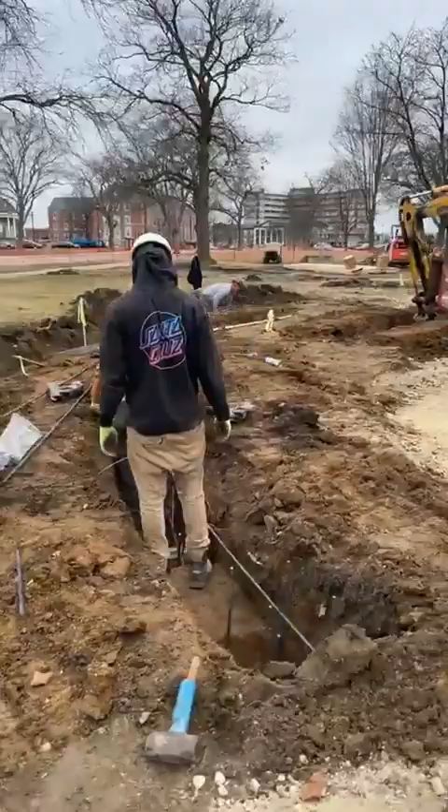Okay, here we go. So we got Milcon Concrete out here, and they've dug the foundations for the seating, and fabricating the rebar.

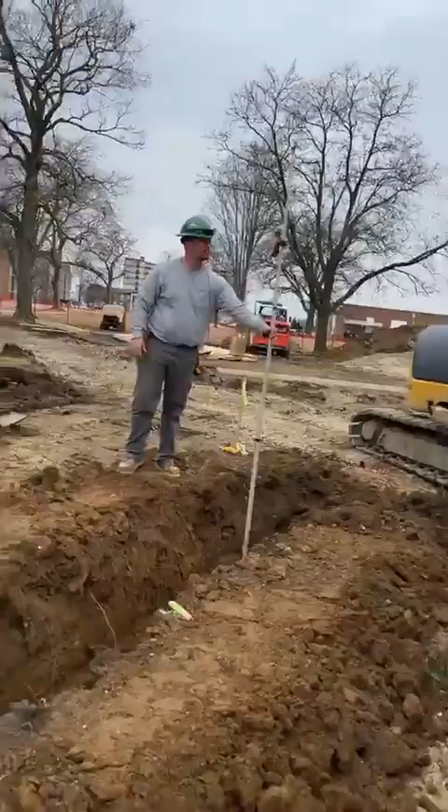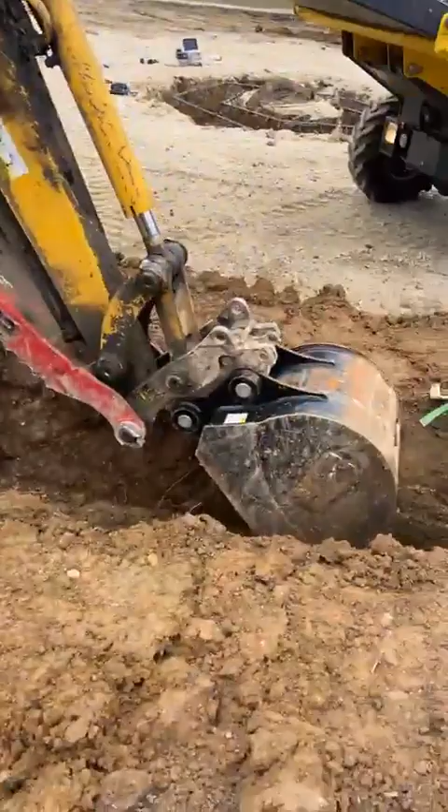And this is Seth. I got it going, Seth. Seth doesn't like to be on camera, but I convinced him to do it. I appreciate that. Yep, so you guys are making huge progress here today already.

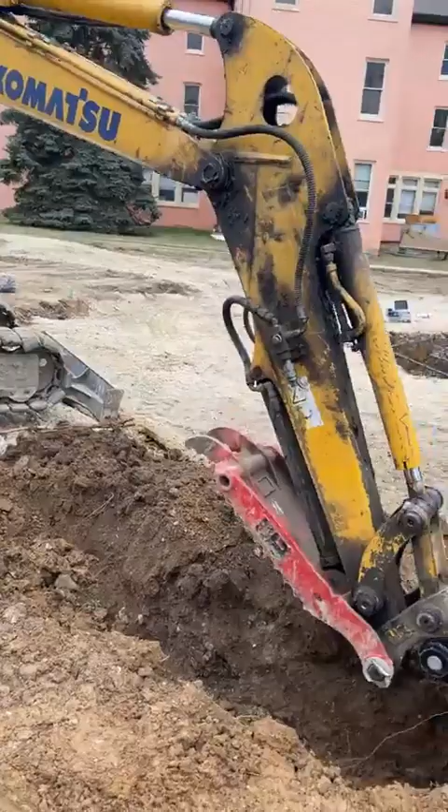I was out here and none of this was done. So what's going on? Explain to me what you did first. Well, we read our blueprints and gathered some information on what we needed to get our foundations laid out.

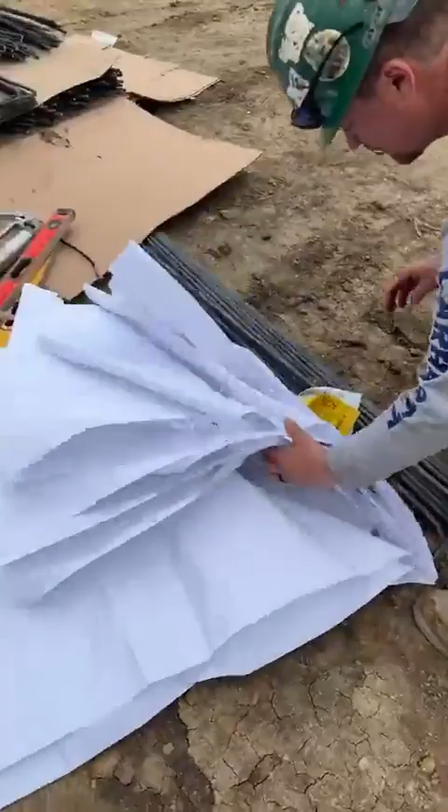Yeah, let's go over and look at the blueprints you got. People are fascinated by what's going on, as I told you. It's a little windy, but we're able to look at our blueprints and figure out.

We're able to find out our elevations of our bottom of footer and top of wall, as well as, I believe, we can find out what our radius points are from our center to the back side of our walls on all those. And then these are the seats, right?

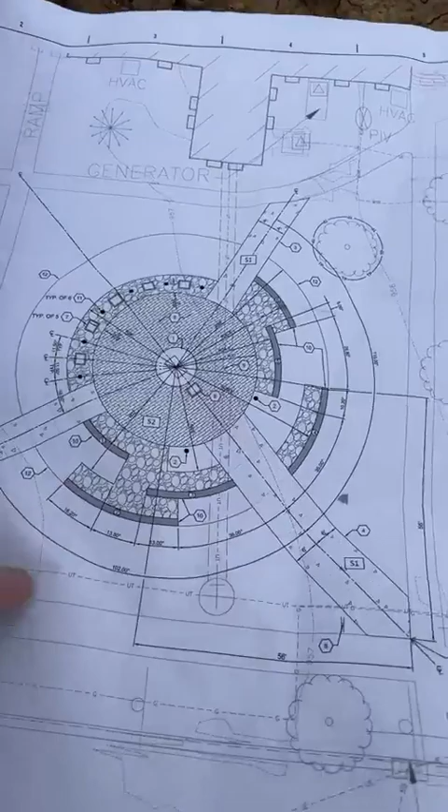Correct, so the radius seats, these are all going to be bench seats. You're pouring the foundations for those? We're pouring the foundations for them, and there'll be a seat wall put on top of that. Right, and it's all rebar, right?

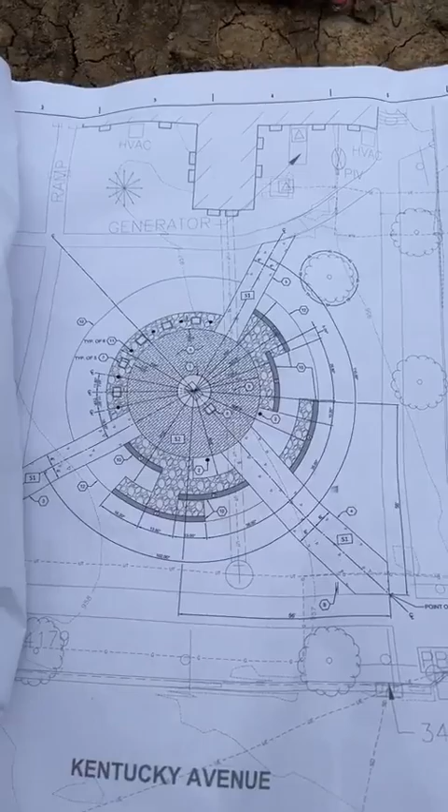Correct. And then the middle, tell me what you did there. So in the middle, we have another radius point that we pull, and we put another wall on top of it to hold a monument base.

And back here, so that footing gets laid out on this radius. Got it. And we pour the footing that holds the concrete wall.

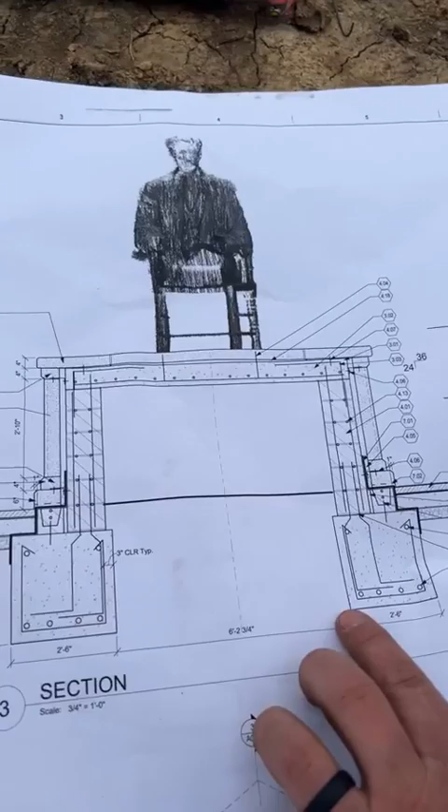Right, and there's a side view of the foundation, right? Yes, okay, with the statue up on top of it. Yes. So excellent - we poured the foundation, and the wall will go up next, and then it'll get capped, and we'll put a cap on top of that for the monument to sit on.

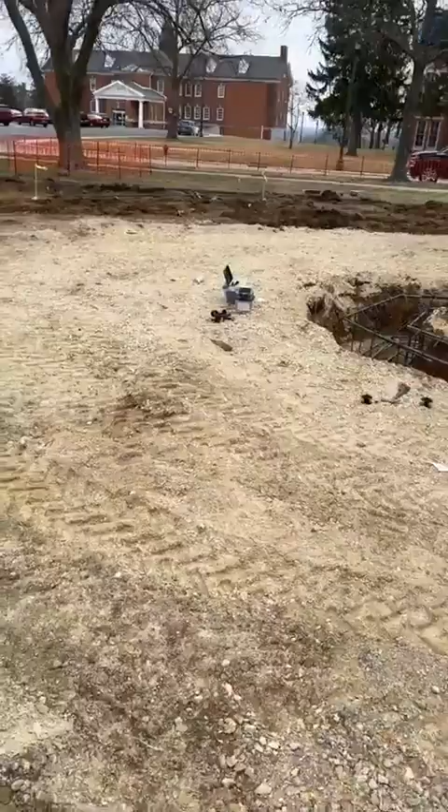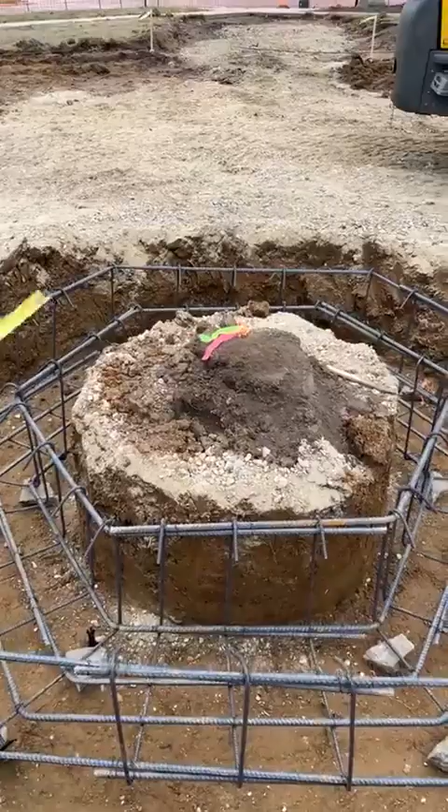Outstanding. So actually show me what you did then over here with the middle, how you dug it out. What we did was we have a radius point here in the center on the nail, and we were able to gather from the print the dimension out to the outside of the wall. Okay, so we just pulled from the center.

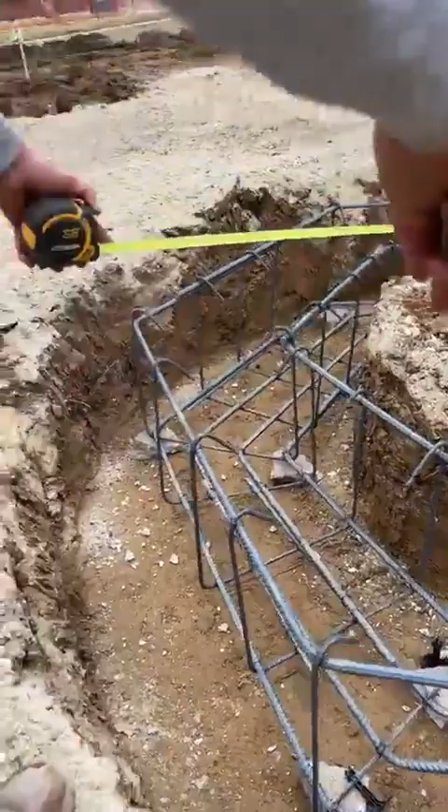Pull from the center, and you just take your paint can and you hold it on your dimension, and you just go all the way around. Got it, you just go all the way around with it.

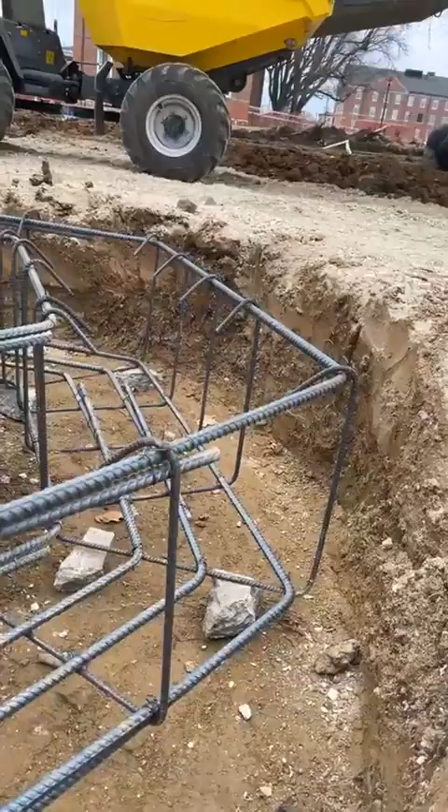And we dug it on a radius. We're able to have our rebar that's already fabbed up from our rebar guys, and we just tie it together and we pour it. All right, so okay, explain to me the next thing that you're going to do.

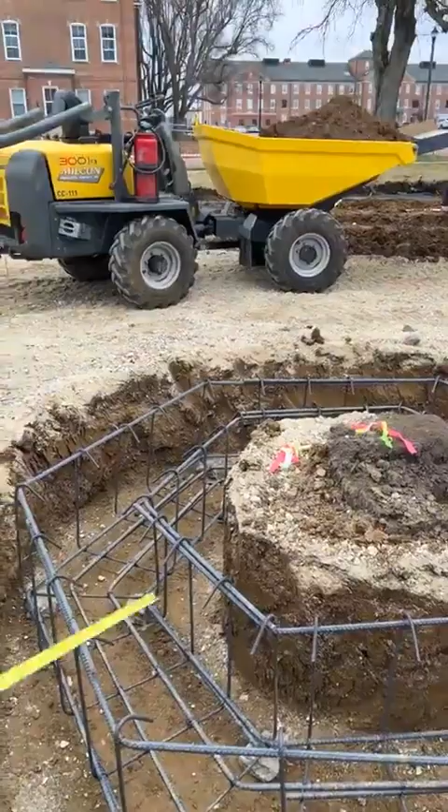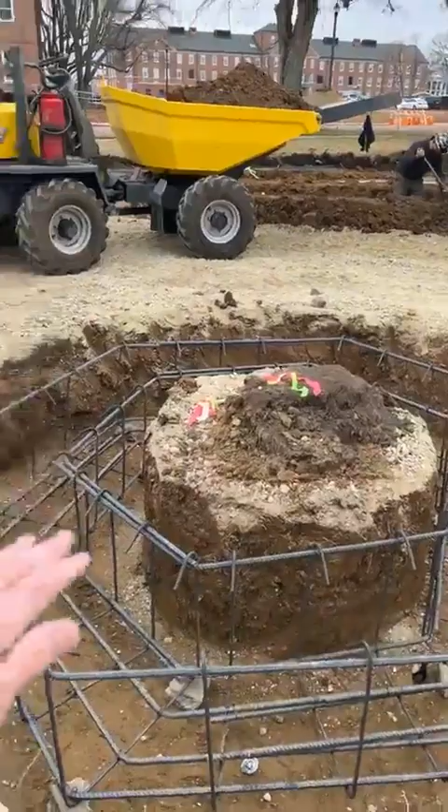That entire foundation is going to be rock solid, 100%. Once that's finished, you'll come with walls on top, and the outside of those walls will be clad in limestone. Then you'll pour a top to it as well, so the entire thing will be capped with concrete. So that's not going anywhere at all.

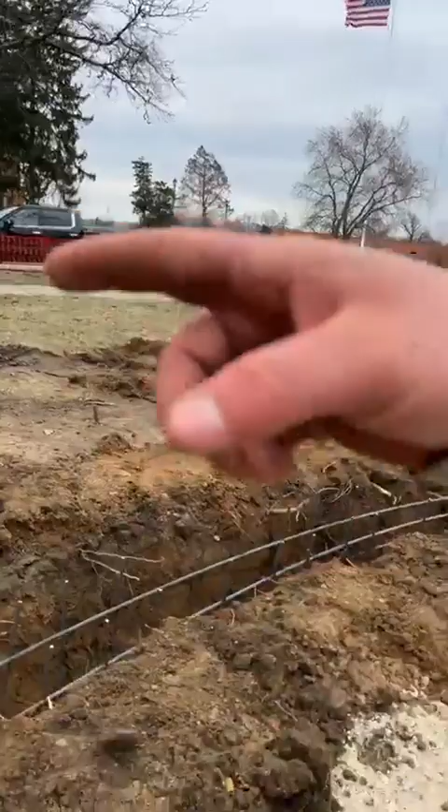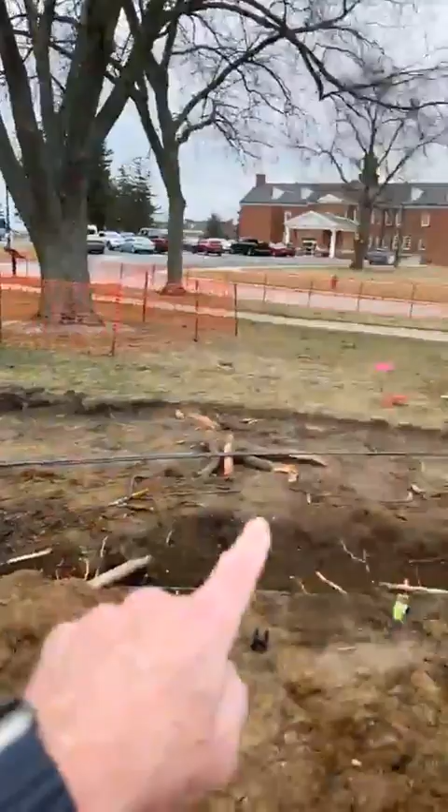Explain to me what you're doing with all these radius seat walls. How many have you got here? We have 6 - 3 on this side with a concrete walkway in the middle, and 3 on that side as well. So you've got one here, one that comes back here, and one over there.

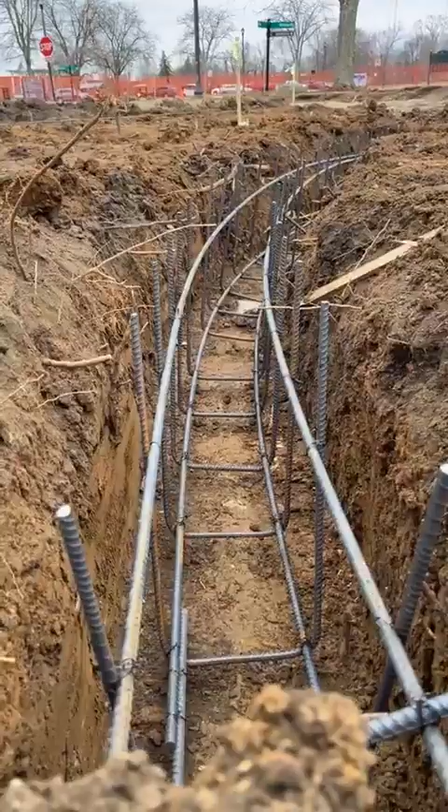So explain what you did here. We did the same thing - we were able to find a measurement from our radius point, measure out here, paint this line, and dig it on a radius as well. Looks like you had some roots.

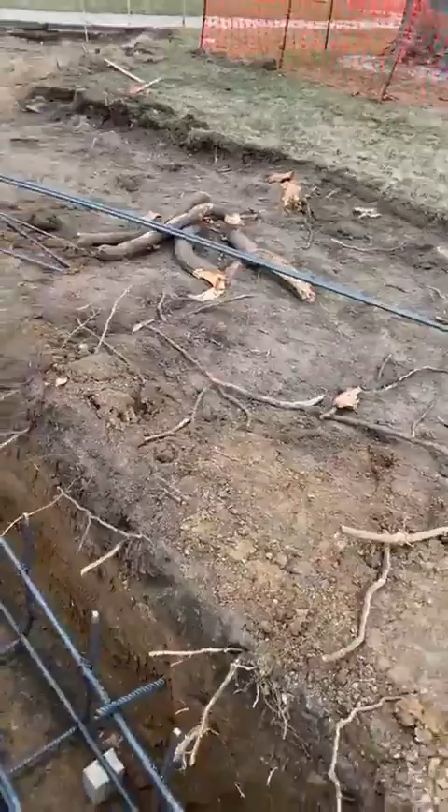Yes, coming from the trees. How bad was it? It wasn't as bad - there was an electric line in the way and a fiber line up here, but we were able to dodge those. So that's an electric line - I think they identified that, so you knew that was there.

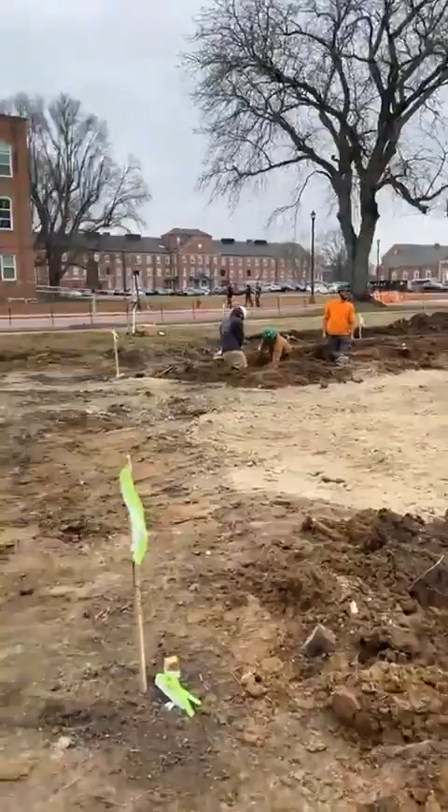All right, beautiful. Let's walk over here and see the boys. My guy's been working hard, making sure all the rebar's put in correct. Yeah, this is awesome.

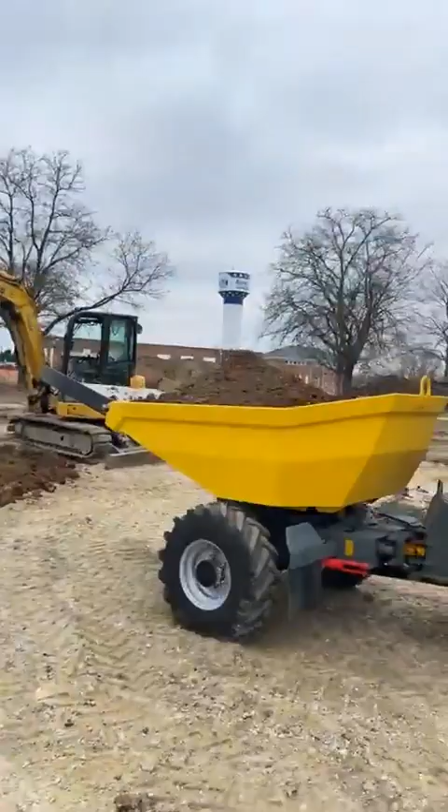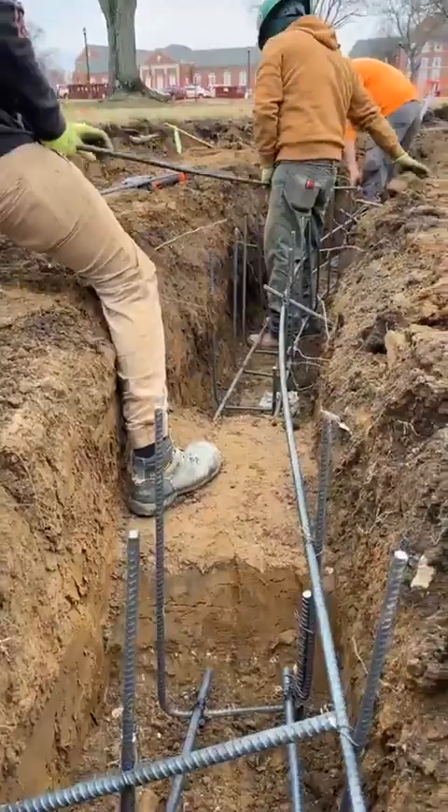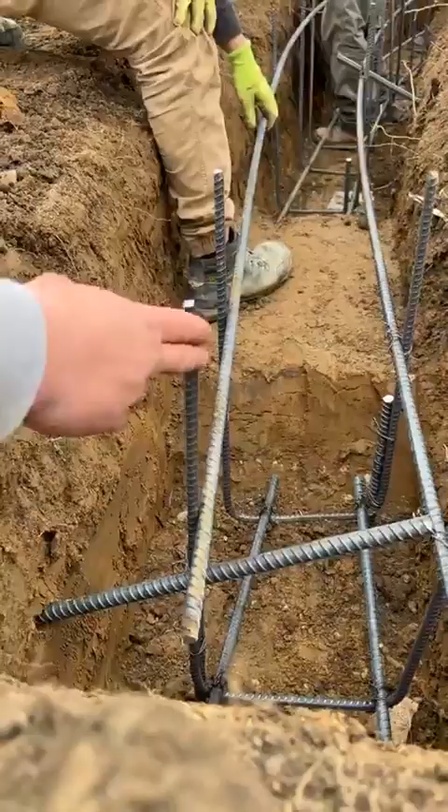Explain to me what they're doing there, Seth. They actually bend it? Yeah, we have straight bars, so what we do is take it from end to end and bend an entire rebar to our ties, and that will hold them in place to keep the radius form.

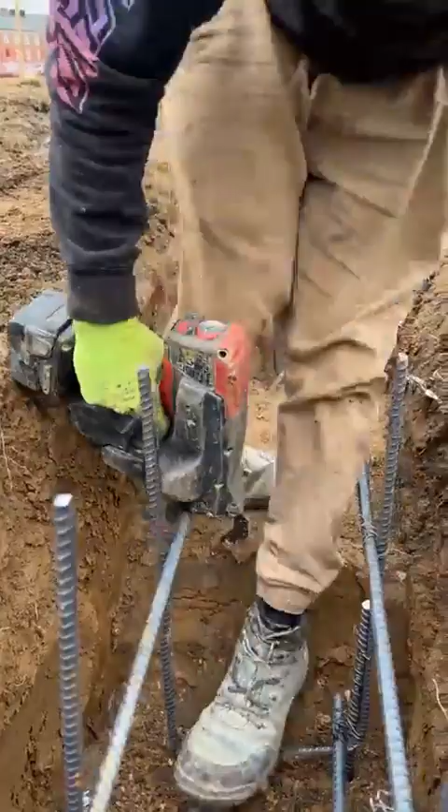Very cool - oh yeah, these seats aren't going anywhere. No, they're not, they'll definitely be held in place. That's awesome. You got your close up there, man - like Hollywood.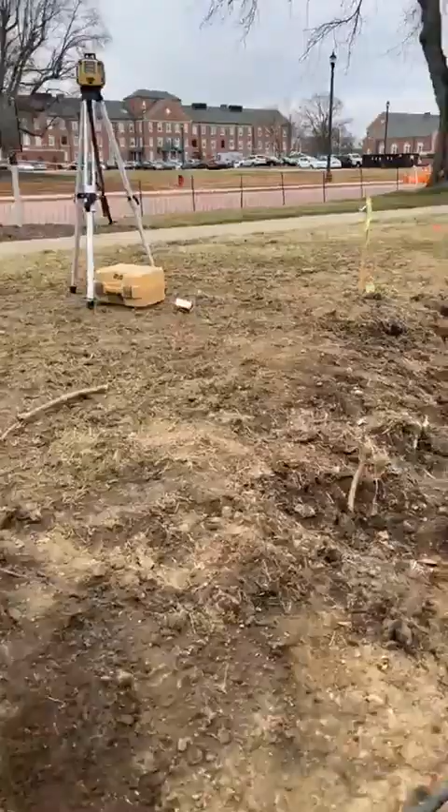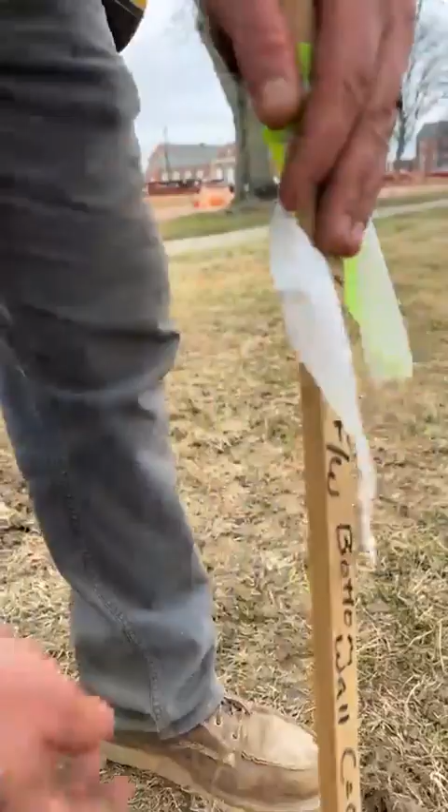Let's walk over here. So this is what it looks like before you do all your rebar. Correct - so we have elevations that we set on the hubs, and we're able to shoot, and then get a grade by adding or subtracting the distance to the top of the footer. So we shoot and find our elevations off of our layout.

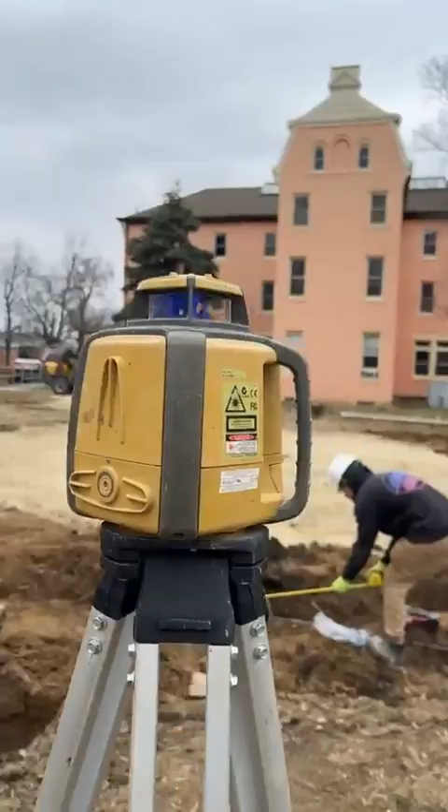And then where's the constant elevation, is it from your device? Yeah, so we shoot off of a laser - you shoot off this laser. Yes, we shoot off of that, and we're able to gather an elevation for each one of the footings.

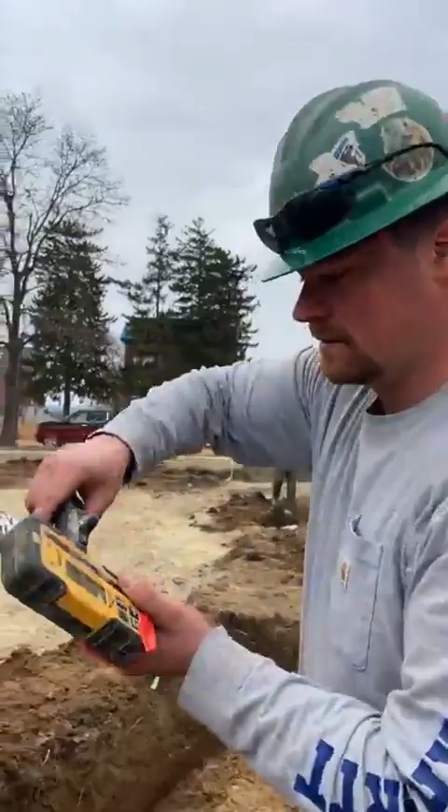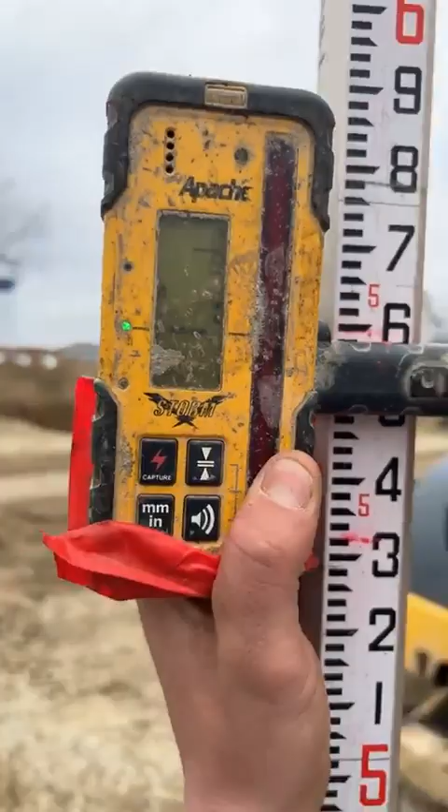And then that's the other part of your laser where you measure from in the field? I have a stick and a receiver that'll catch that, and we can use it to get our... show me how you do that real quick, and then we'll finish up. Basically you take the laser, the receiver, and you wait until you get a solid beep. All right, and that'll be your elevation, and you'll cut or fill depending upon there.

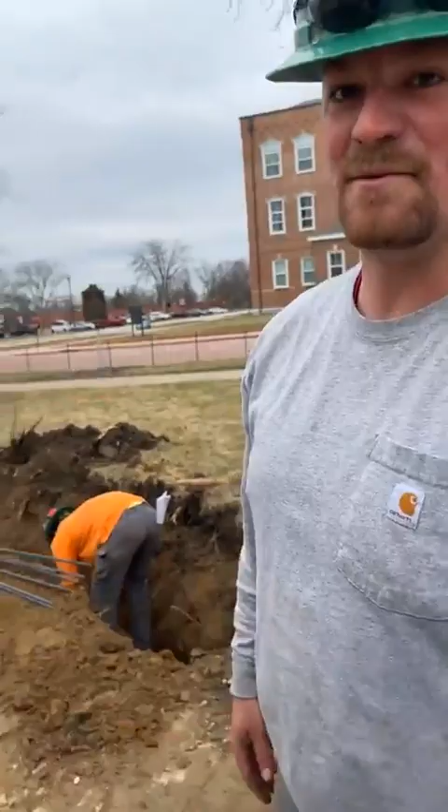Well Seth, appreciate it brother. Thank you very much. And we're going to hang out for a little bit and then wait for the concrete. Yep, and thanks everybody, appreciate it.